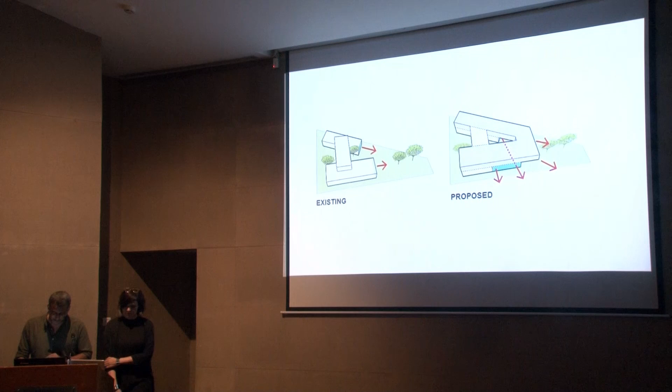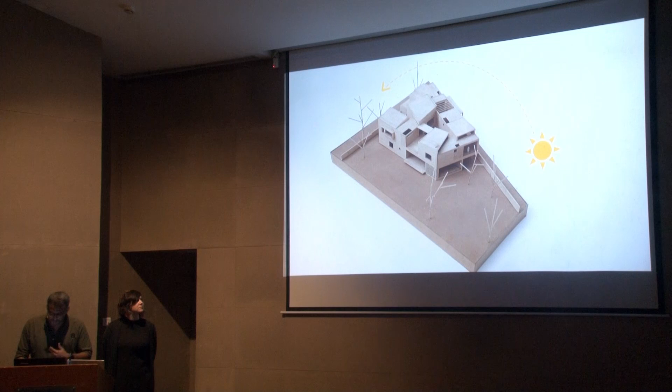The family was keen to retain the sloping roofs. During conversations with them, we realized it had little to do with the actual form, but the experience from the inside. So we reinterpreted this through a series of one-directional sloping roofs with clerestory windows that allow for softer north and east light through the day.

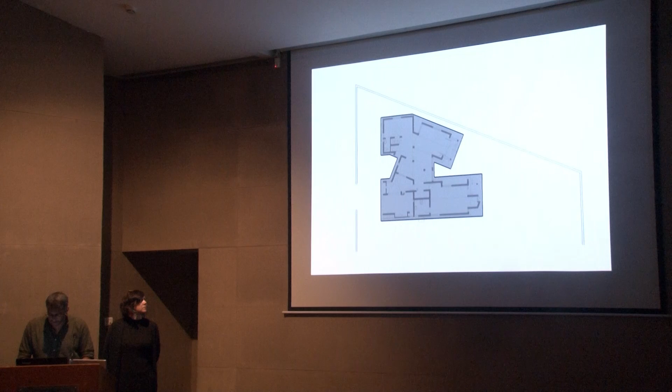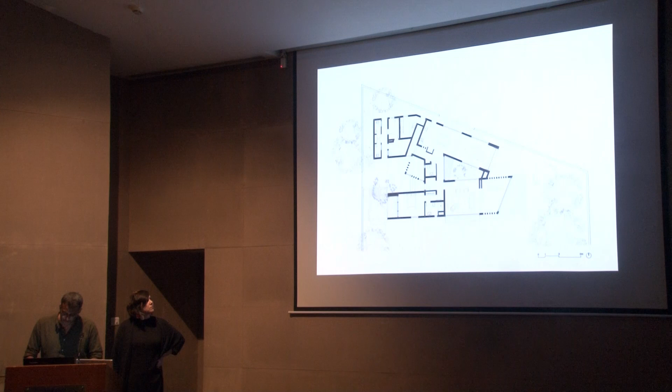These plans show the layout that was a direct result of extending that existing footprint, to enclose a central court with a high level of porosity between spaces both at the ground floor as well as across to the upper levels through double heights and diagonal views.

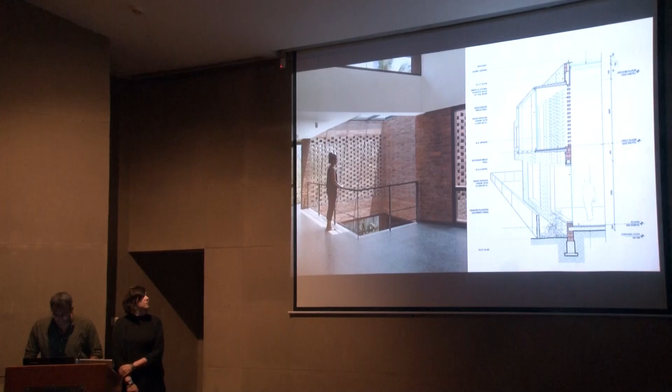We also just wanted to show a little bit about how the structure was made through the narrative of the space. A double height between the family lounge and library above and the open kitchen and dining space below ensures interconnectedness. The dad joked that he wanted a space that he could watch his kids coming home at night. And so this family space is the heart of the home and a visual connection between the public and private spaces of the house.

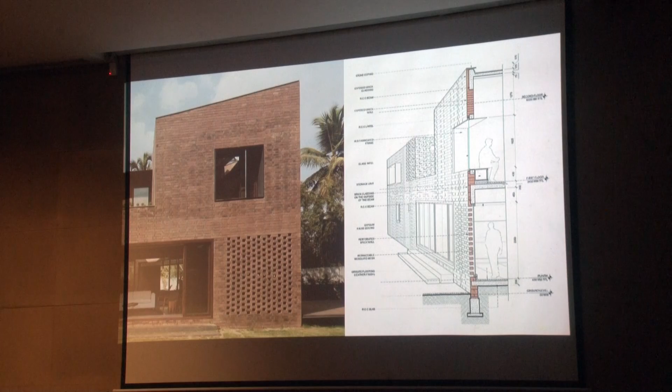The slabs and beams were set in by one brick to allow a continuous uninterrupted volume from the outside. The rough brick is contrasted with these crisp metal punches forming windows, window seats, and clerestories. The small triangular court at the center of the home stays a reminder of the original foundation and the history of the site, creating complete porosity between inside and out. This is the master bedroom at the back corner of the property with views out to the last remaining parcels of farmland in the area.

The project is located on a steep sloping site overlooking the Durgam Cheruvu Lake. Due to this topography, the site has prime views across the water to a nature reserve on the right and the contrasting density of HITEC City in the distance, which is at this point just starting to be built out. This is a 150-acre tech park that has become a prominent part of the urban landscape.

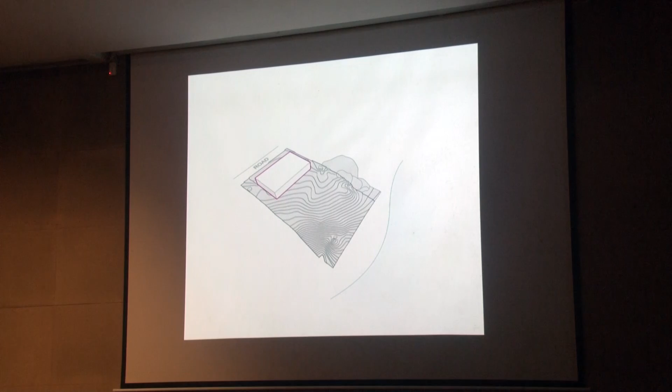Imagine that there are these volumes that are opening up to capture views. Yeah, the three portals. Anyway, so let's go back.

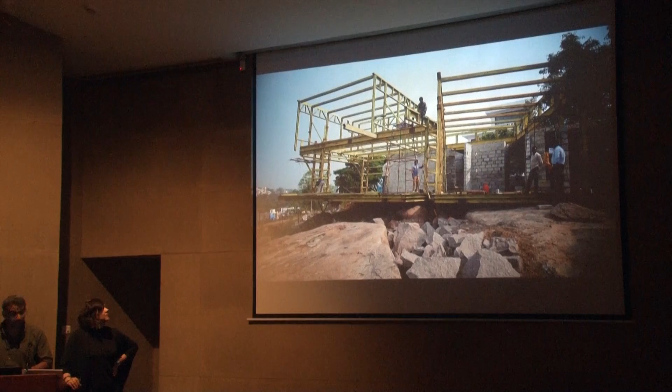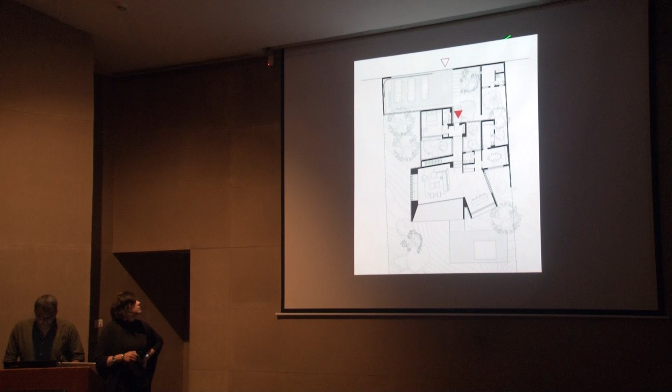So contrary to the standard architectural response in Hyderabad to fill, level, and clear the site, the lake house hovers above the land, allowing the natural terrain to become a celebrated focus of the architectural experience. From the road on the top of the plan there, the building appears solid and opaque, concealing the panoramic views that are framed by these portals at the bottom.

A tension between heavy and light was used to establish a strong material and spatial logic. Along the road, the structure was made in a heavier masonry construction, while the structure towards the lake appears to float in a lighter steel frame. The masonry on the flatter portion of the site is also used to structurally pin back the cantilevered steel structure.

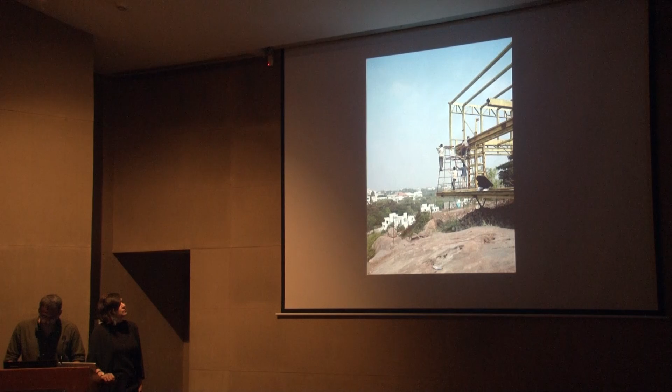The early brief was to build something that was temporary, that could maybe be taken down if needed, but we wanted to build something that was permanent. And about 7 or 8 years in, this space is being used almost every single day, and it's not going anywhere.

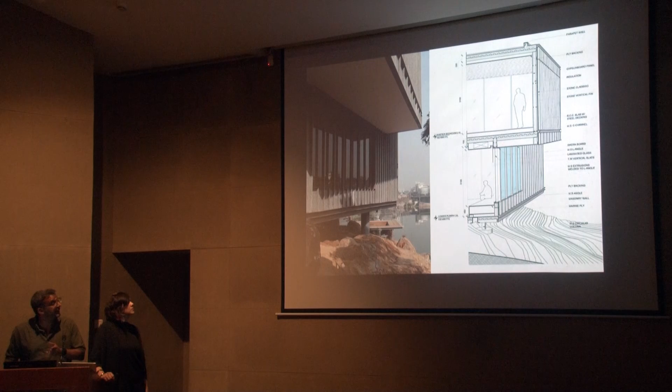The structure is clad with slabs and thin ribs of a local grey granite. This creates a subtle play of shadow while maintaining privacy from the neighbors. These stone-clad volumes really showcase the skill and precision of the masons who executed the stonework, everything on a very strict, repetitive 300 module. These are images from the lake of the finished project, looking at the cantilevered stone volumes with portals clad in wood.

These are some details of the stone cladding with the wood screens that allow for filtered views to these landscape courtyards around the house. The landscape also highlights the transition between wet and dry as an integral part of the experiential narrative.

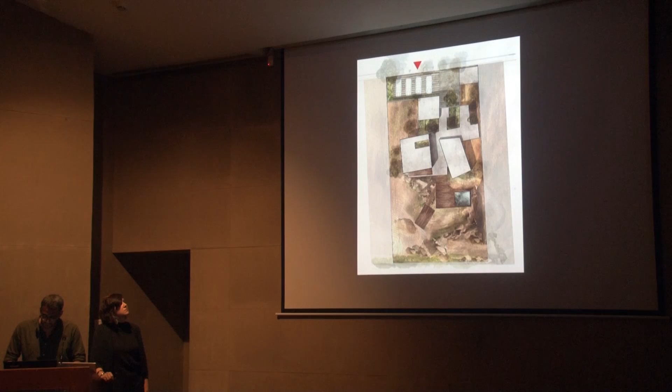As one passes through the building, you get a first glimpse of the view beyond. Slowly, this lush verdant planting of the entrance and passage falls behind, and the dry and sort of rocky landscape of Hyderabad reveals itself, along with this extraordinary panoramic view out to High-Tech City, which is now fully built out.

Today, sustainability is a buzzword, used very loosely and often just as a quick visual response to materials used. This is unfortunate given the rich heritage of resourceful climate-based construction of the past. With materials as a core interest of our studio, we are constantly exploring new methods of construction that are sensitive, local, and long-lasting. In this context, for us, saying we are a responsible studio is a more meaningful approach.

And to tie into some of the other work that we've shown and the projects that we'll go over now, we are interested in responsible solutions, which include sustainable strategies, but in a way that it's hidden. It's not something that needs to scream, I am incorporating all these technologies. We want it to be embedded as part of it by default. So for us, we're much more interested in the type of materials and the way that they translate into a contemporary form. And it's just a given that certain solutions are automatically incorporated.

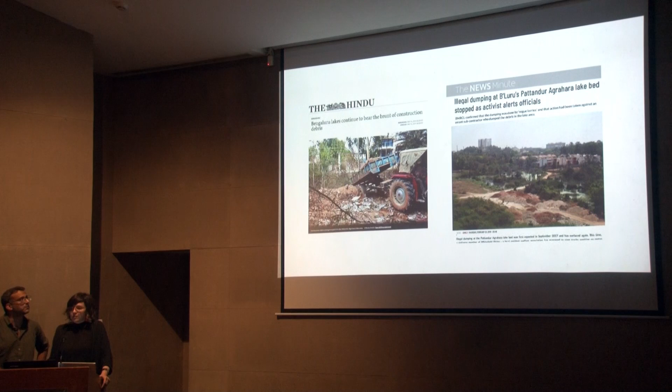In Bangalore, land values are disproportionate to construction costs, so existing construction is given little or no value. This means that there's a constant cycle of demo and rebuild, especially as zoning laws change to allow for more density. Without clear regulations, most demolition waste is sent to illegal dumping areas, often dry lake beds or abandoned urban sites, and it's becoming more and more difficult to find ways to dispose of debris.

When we first were working on the brick house that Cyrus showed before, we really wanted to reuse all the existing brick, and unfortunately it just wasn't possible in that project. So at that time, we started thinking about waste as a resource and how we could use it going forward. When this house came along, we pitched this to our clients as an idea, and they were really excited about it. So here is something that is just dumped and disposed of versus a material that actually has a lot of potential to create a new home in a new language.

We were fortunate that the old house was primarily built in brick and mud with very little steel reinforcement. It was actually amazing that the slabs would stand, they were so thin, but this meant that it could easily be broken down by hand. If it had been a higher percentage of concrete, it would have had to be broken down industrially, which would have meant the material had to go a very long distance, and this wouldn't have been viable. But for us, this house was the perfect option to explore material reuse in a way where it stayed on the site and took on a new form.

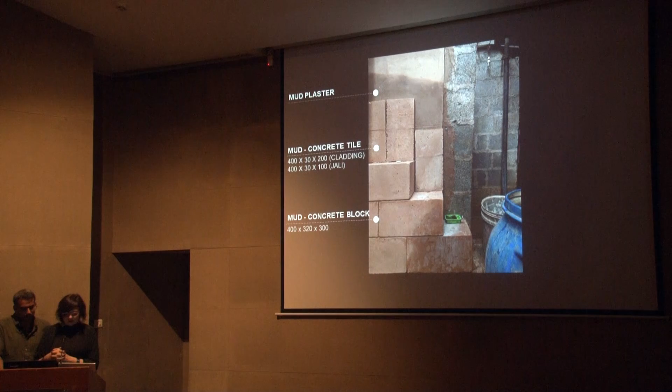So we worked with a professor from IISc who specializes in mud construction to confirm the viability of our approach, finalizing on a palette of mud plaster, mud concrete tiles, and mud concrete block.

The mixture was then refined and tested for durability and load-bearing capacity. Since we did not have any major excavations on the site, the soil was sourced from ongoing construction sites in the area. The total buildup of the house is around 4,700 square feet.

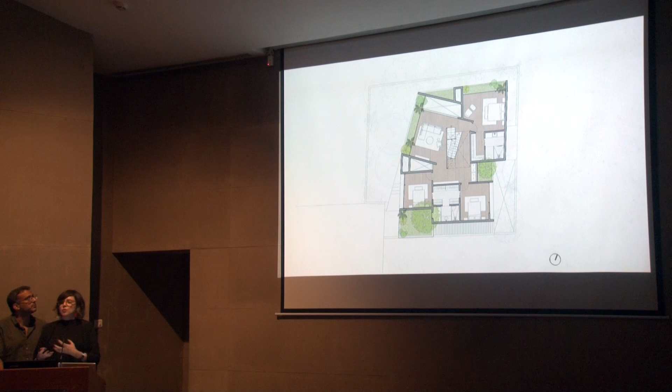Another interesting point here is that we had originally imagined that the stone floor would move throughout the house, but the parents, having seen how their children reacted to a wood floor in their current apartment, really wanted to have this because they felt that their kids engaged with the floor in a different way. So they could run, they could slide, and to us that was a really interesting feedback to incorporate.

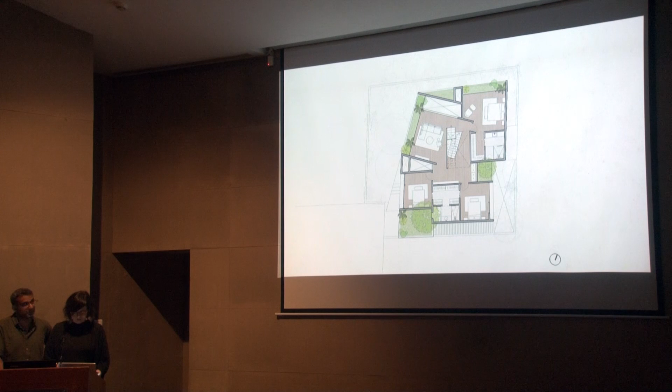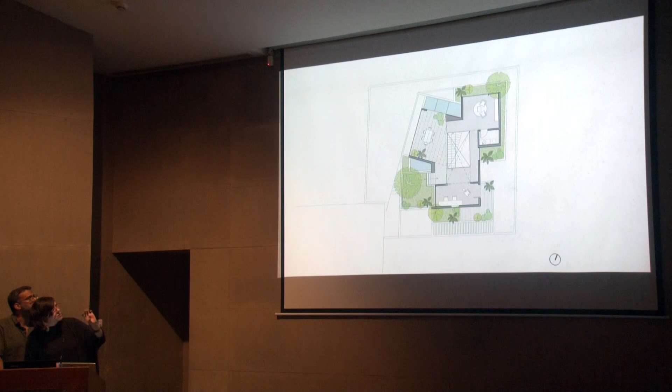And on the second floor, here you can see that there's a cutout to the bottom where there's a staircase that moves throughout all the levels. We have an office, a music room, and a little terrace with a pergola where the mango tree comes over the top.

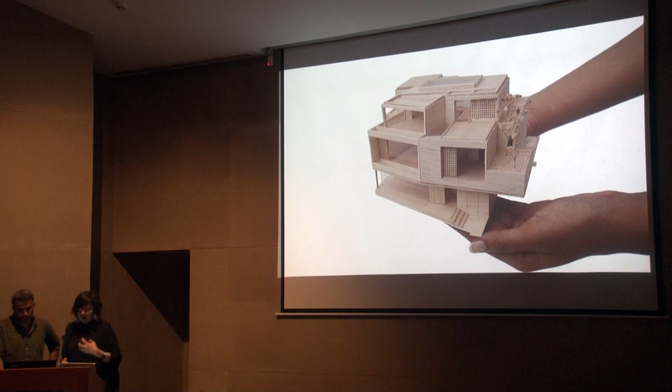So with limited space at the ground level, this model shows how terracing was used to bring landscape to every level. With the building completely disappearing from above, any open space left on the terrace was used for services, including a heat pump and solar, exceeding the building's capacity for power.

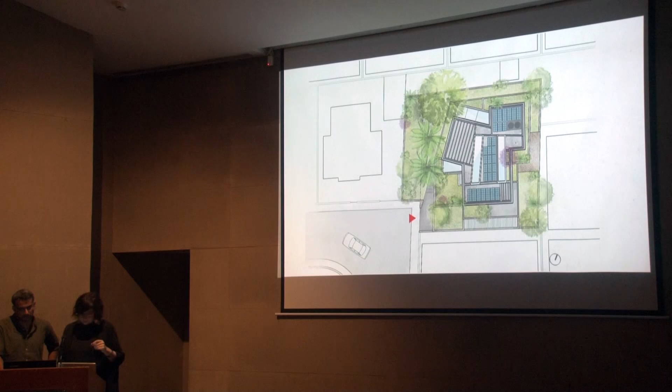So given the inner corner condition, we were really concerned about natural light coming into the space. The skylights here illuminate the core of the home, and they allow for light to move throughout different spaces in different ways. We also played with planter depths. If you see over the entrance drive here, this is a really deep planter.

Part of the client's wish list was to have fruit trees around the house. And with such small setbacks, we were able to accomplish that by bringing them at different levels of the home. So right now we have a big grapefruit tree over the garage. We have lemon on the terrace. There's just all these different plants around the home that have personal meanings to the people that live there.

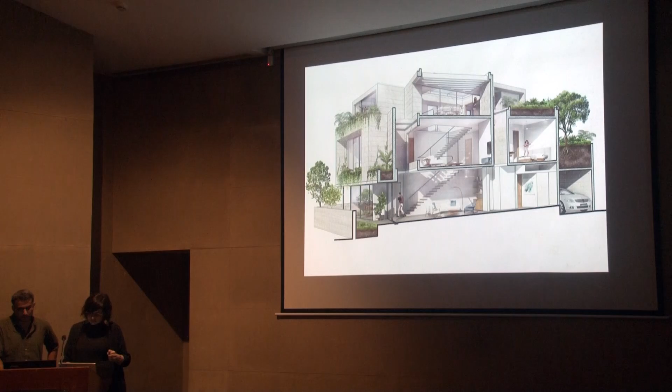So one of the major challenges of this process, and I think in a perfect condition, we would be using the waste on the site. We would be getting the soil from the excavation on the site, and then we would be casting blocks in the same location. This is a perfect world. It's not perfect in general. So we had to find a location to cast the blocks. And this was a challenge in Bangalore because any production of a building material like this could be viewed as a commercial venture, which would lead to problems.

So we eventually found a site that was about 6 kilometers away from our location that was large enough to house the workers, to hold the materials, and to do the casting. So this casting happened as the structure was building up. And seeing this process was really incredible.

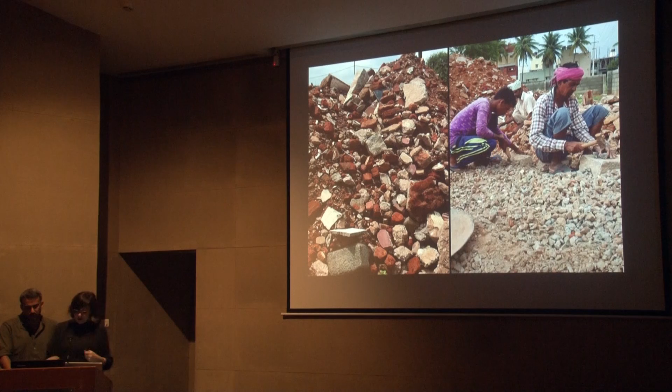I mean, to the image on the left, here, you can see the bits of, you have the brick, you've got a little concrete, you've got tiles. The whole history of the original home is there. It's then broken down into smaller pieces. You can see here on the right side image that they're separating the concrete that will be used for aggregate in the process. And then you just have the materials being kind of pulled apart and then brought back together as we make the blocks.

So the final, we tested many different recipes, we'll call them. We looked at strength, we looked at color. We started off with this kind of designer approach to saying, we want this exact color, and then very quickly realized that that's not something that we can control. It's so dependent on where the soil comes from.

But the final mixture was brick debris, hard debris, which was the concrete, sand, soil, cement, quarry dust from the local quarries, and lime water. So just a few images of the process.

And we actually have a video of this, but it doesn't capture the beauty of the process. I mean, there were stations for every material. There was a proportion that was assigned to it. And then when the machine started, it was like a dance. So you had one guy coming with lime here, one guy coming with the brick debris here, and it was all put into the mixer. And it was just this incredible process to watch.

And so then after it was mixed, it was poured into the custom molds that we made. It was then vibrated by hand. Again, ideally you would want to do mechanical vibration. It would give you a more even finish, but here, due to the site, we did it by hand. It was then smoothed, and finally it was air dried. So we did in total about 8,000 blocks. They were then stacked, dried on site, and when we were ready for them, they were transported.

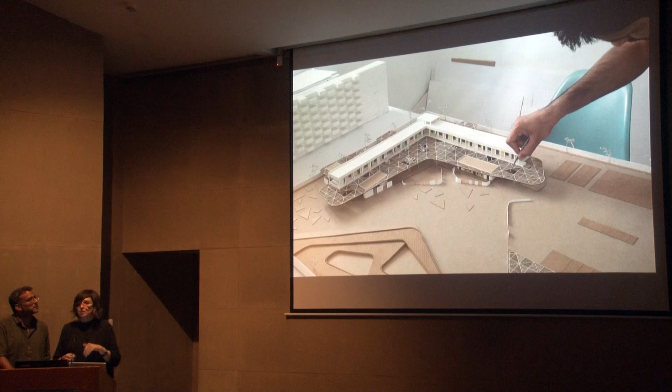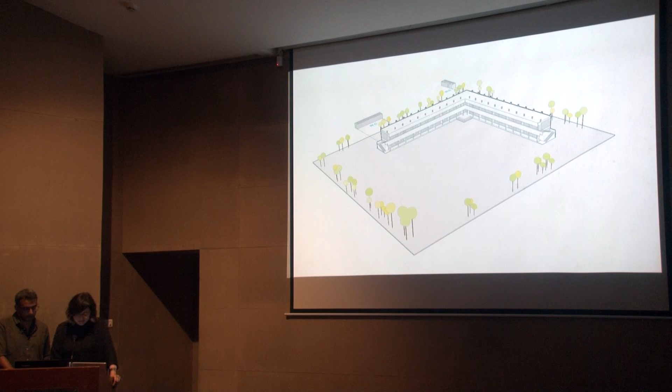So while the client was open to taking down the old building, we wanted to keep the existing structure. We had really enjoyed the process of the adaptive reuse project that we did on an old watch factory into a Montessori school. And there's something about these large span spaces that is really conducive to academic environments. This building just needed a facelift, that's all. So we kept the existing structure.

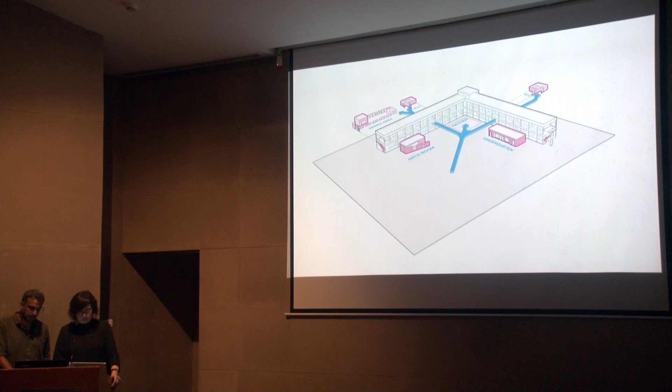We reworked the existing oversized classrooms to increase the school capacity from 400 to 600 students, and we opened up the facade for far more light and ventilation. A subtle but strategic use of color and pattern through jalis gives each classroom an identity.

Gathering spaces are important for any learning institution. To respond to the climate, we introduced pockets of landscape using regional plants and trees to not only soften the architecture, but to also provide shaded spaces for the children to come together.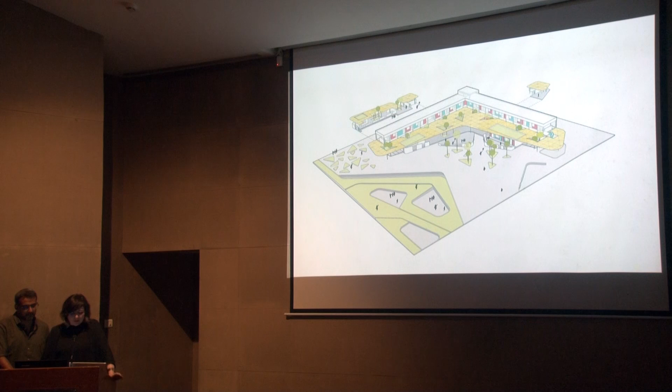Now, all this is tied together by 15,000 12-foot long bamboo poles that form a playful undulating canopy that connects the main building to these pavilions. The additional canopy, along with the pavilions, doubles the total usable area in the school from 20,000 square feet to 40,000 square feet.

And when we initially made this proposal, we had no idea that the client was actually going to go for it. They could have said no to any of these things. And after we made our presentation, everyone was on board. It was really incredible.

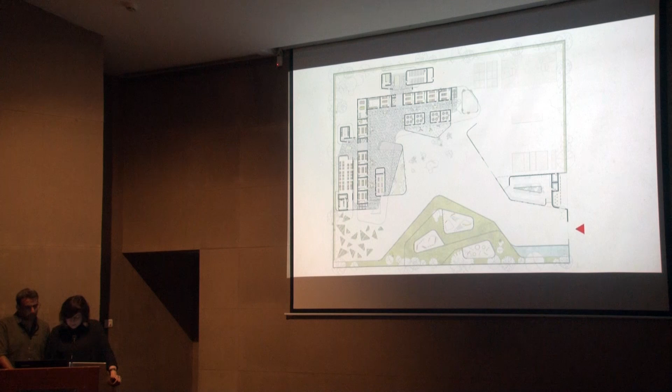So you enter the property from here. This was our initial proposal for some landscape that maybe will happen in the future someday. This is the cycle stand, and this is a little waiting area for parents. Before, there were only trees along this edge, and all the parents would come in and sit here. So now they have a shaded place to stay. This is a little store for them to pick up the books and uniforms as required.

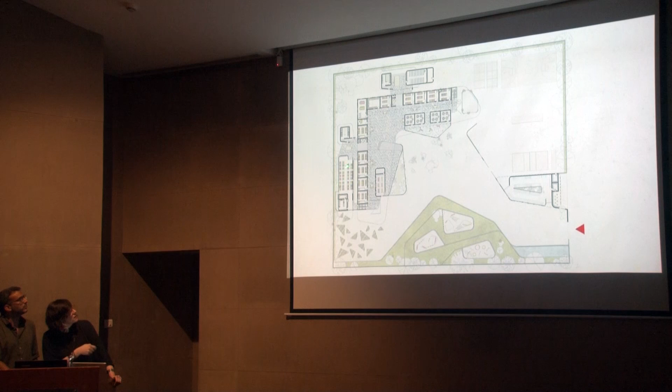Cycle stand, and then as you come in, this whole area that you see in gray is actually part of the canopy. There's a little sand pit here for the tiny kids, kindergarten and pre-K, and then you have all the classrooms, labs, teachers' rooms. This is a bathroom, and multi-purpose space here, and then we have a dining hall here and an art room.

The lower floor is for the little kids up to 5th grade, and the upper level is for the older students. This also has a computer lab, a science laboratory, and a faculty space for the upper grade teachers.

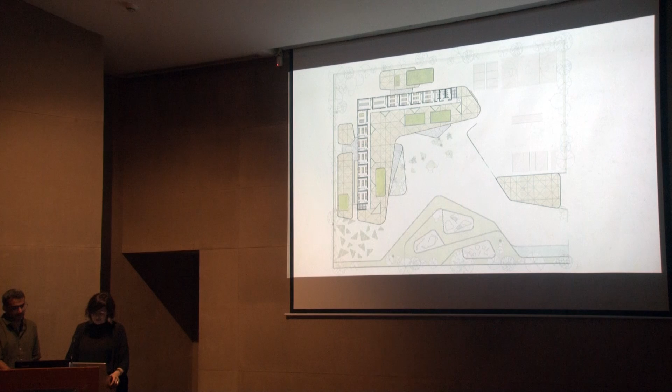Now, there were two main challenges during the construction. One was material supply and labor at a really remote site. We made a conscious effort to ensure that the materials were sourced locally. Nothing came from more than 100 kilometers away. This includes the bamboo that was harvested through local government forestry programs. The stone floors used waste from the stone processing facilities in the villages nearby.

The cement came directly from the factory next door, and this was used for the wall construction as well as the jali screens that were cast on site. Finally, the facade was finished with a simple cement plaster, and the labor was local, largely unskilled, but trained and supervised by the engineers from the cement factory.

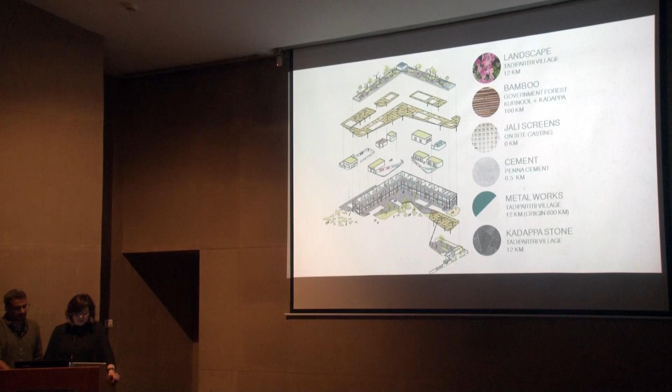The second challenge, and I think that this is a challenge for any project that involves CSR funds, is that the school had to remain operational for the 6 years of construction. This was something that we were in for as long as it was going to take. It would pick up pace, it would slow down. It just was as the money was available.

But it was amazing how the factory team, the faculty, and the students just went along with the process. We had to zone the construction, the students moved around. At some point, they would be sitting outside on foldable lawn chairs with just a little board doing their exams. Everyone had a smile. It was just really incredible.

And the head engineer of the plant who oversaw this process, maybe 4 years in, we were walking around the site and he said, everyone asks me, what are you doing? You could build like 4 cement plants in this amount of time. And he said, come to the school and see what we've done, and then you'll understand. And so for us, that was really meaningful. Every site has its frustrations, but here, I think everyone was really doing it from their heart.

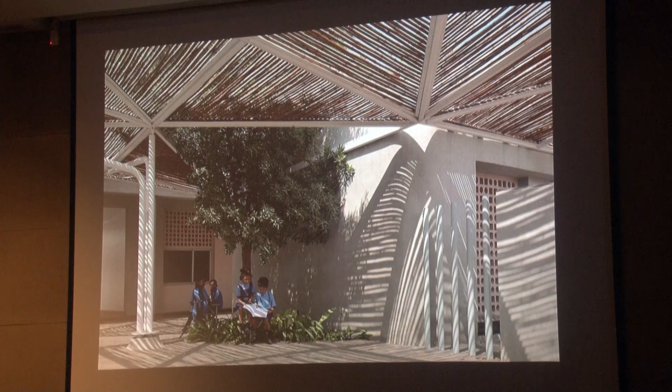Even the Vastu consultant that the client had, at first he was like, all the walls and all the corners need to be right angles, and then we went back and we were like, but this is a school, we want that soft corner, and so he was like, okay, fine, I get it. I have a young child as well, and so he said it's okay for the exterior corners to be curved as long as the interior corners were straight.

And because this was actually built by engineers from the cement factory and not people that had construction experience, the engineers themselves really geeked out, and they made sure that every line was straight, every corner terminated properly, and in the end our civil quality was probably better than most of the high-end residences that we do. It just took time, that's all.

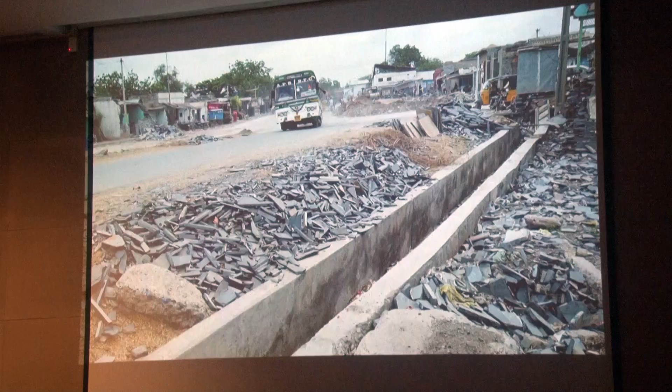So kicking off the project, we knew that we wanted to build in a way that was a tribute to the past, that had that weight, that permanence that the stone architecture of Bangalore had. We wanted it to be grounded, we wanted it to be specific to place, but we also wanted to find a way to do it responsibly.

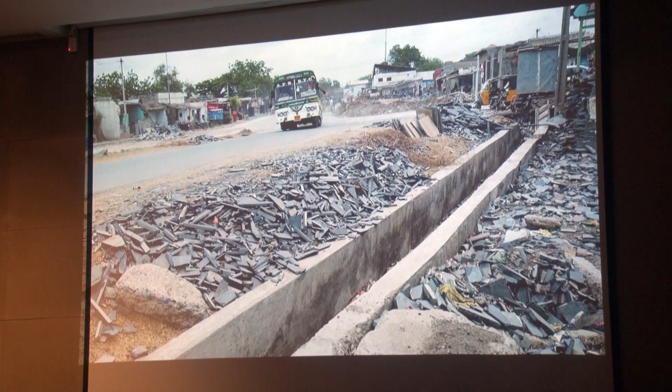So we thought back to 2016, when we first went to this Penna cement factory. On the way, we drove through the stone processing towns where they process Kadapa, and the roads were covered with waste from the offcuts of the production process. And we were really blown away by the fact that in this little village, the community had adopted this material as their standard form of construction.

The structures are completely load-bearing, and they were beautiful in their own way. We were like, okay, this is like a Zumthor project, but in this village. It was really incredible, the way the stone is used. Sometimes it's plastered, sometimes it's left exposed.

And in this area, due to the road widening, they've been knocking these buildings down. So when you go, you actually see them in section, which is sad, but interesting at the same time as an architect.

So by chance, when this Nandi Hills project started, we were also doing our office floor. And this was an old house that we were just touching up, and so we wanted to use stone, and we wanted to save money. And so we were looking, cheap and best. When it comes to yourself, it's cheap and best.

So we were looking at 10 mm granite tiles. They used to be really popular. Now they're not as much, but the Sadahali ones are still going strong.

So after researching the process, we realized that there are these small quarried blocks that are then cut into 1x2 tiles. But if you can see here, you have the module of the tile, but then there's all this extra stuff that's there. And we realized that the same waste was being generated very close to the Nandi Hills site.

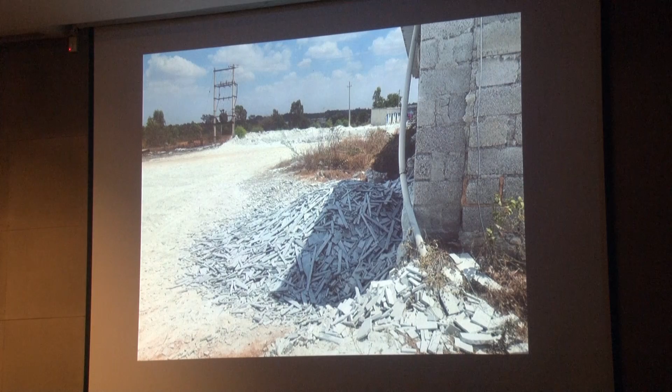So we said, let's use it. Let's see what we can do with this. We had really wanted to use the Kadapa waste, but then when you consider the transportation associated with driving it such a far distance, it doesn't really make sense. This made sense to us, and we were really fortunate to have clients that were interested.

So this was the moment of truth with our client checking the wall mock-up. And we were very clear that this was not going to be a fast process, but this was something where the exterior of the building would be finished as these walls were constructed. And for them, they really liked that idea. They also liked that it was connected to place. They liked the texture. They liked the color. So all of that kind of came together nicely.

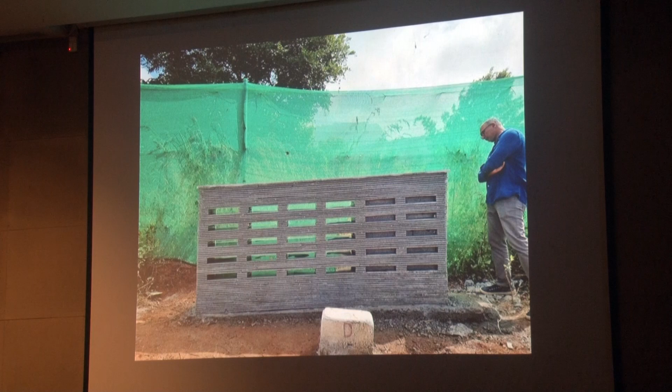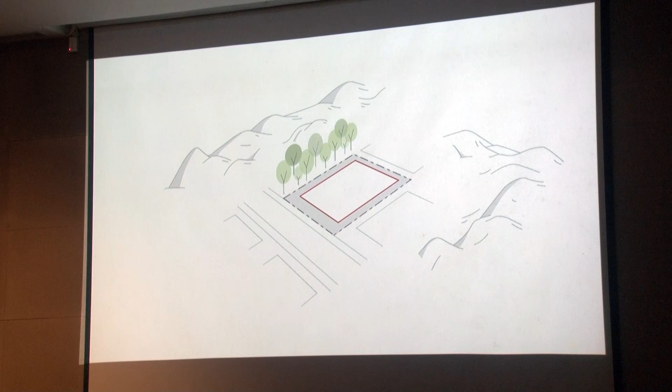So just quickly taking you through the site location. This is part of a plotted community, but everyone can build their own house however they want it. Originally, it was a Bali theme. As you see, we did not pay attention to that, or maybe we forgot to read that part. So the site, one second, we just kind of took the massing up, looking at what we could do. And as a response, we started to play with the volumes, looking at sun and views. And then, of course, how we integrated with the landscape.

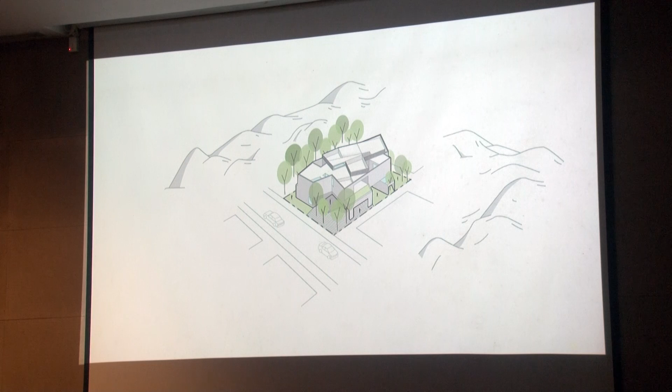In Bangalore, the climate is great. It allows for plants to be inside and out, and AC is becoming a bigger thing, but we can really capitalize on the outdoors. So the ground floor, as maybe you can tell, we like to play with our plans a little bit, but this all comes from thinking through experiences. It's really about the relationship between spaces. This is for a couple that are looking to move here full-time. They don't have kids, it's just them, and we really wanted to create a space that was special. They do a lot of entertaining, but it's at a small scale.

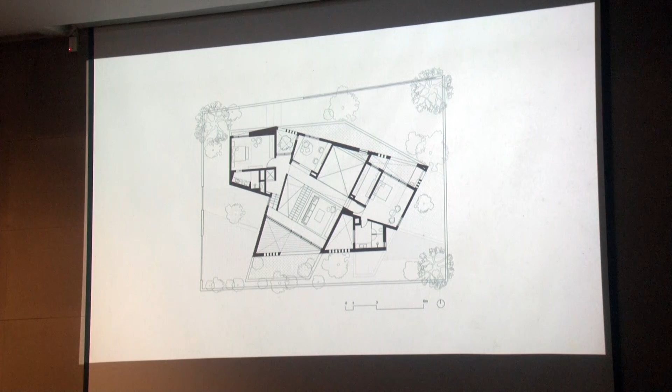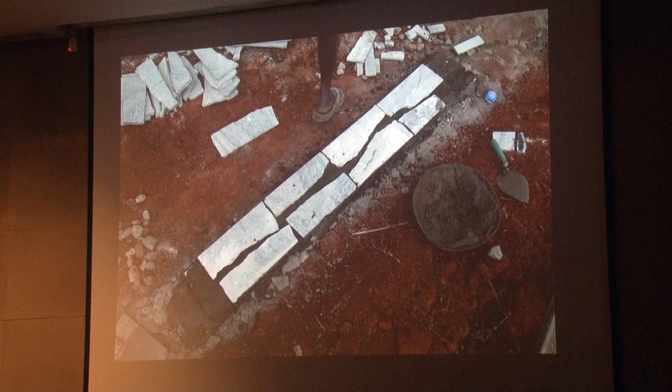So we started with the idea of let's do some load-bearing walls. The idea was that we took the straight edge of the offcut from the tile production, and we put the jagged edge on the inside, which allowed us to keep that precision of the exterior. Again, this is a hidden story. It's something that the homeowners and we are very aware of, very passionate about, but anyone driving by would have no idea.

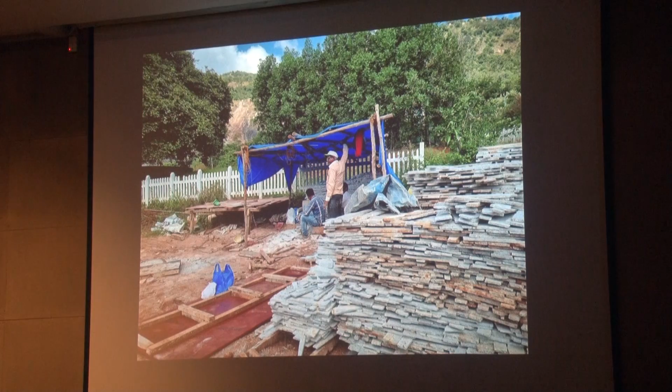This load-bearing strategy also didn't work. It didn't make sense for many reasons, but this generated a research process that ended in a hybrid wall construction that is quite interesting. So here you can see the waste material came to site. Every week a truck would go around to all the processing plants and pick up their waste and then bring it to our site. And the process of laying these offcuts, I mean, it is really time consuming, but it's quite beautiful, and you really feel like the structure is grounded. You can feel that weight.

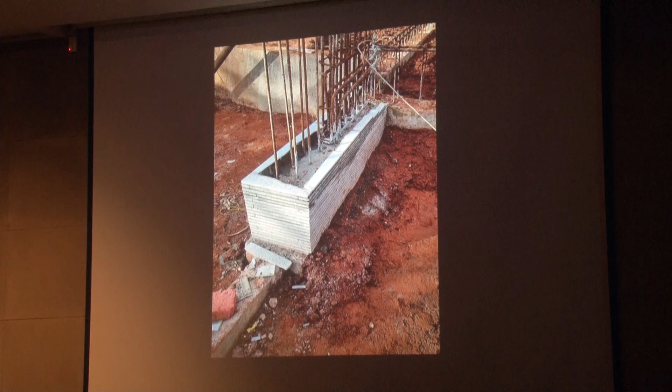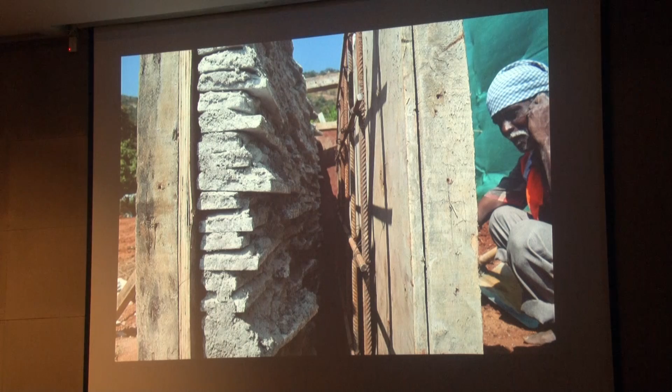So what we ended up doing was a hybrid wall construction. The offcuts are placed smooth side out, rough side in, and then rebar is put in the center, and we cast concrete at 2-foot increments as the walls came up. This image shows when 3 sides of the wall are exposed. And this is an image showing where we would have a plastered surface on the inside and the stone surface on the outside. So you can see here how the formwork just holds that in place. And this really captures the kind of rawness that is now embedded within the walls. Just a quick view as the foundations were coming up, and then as the walls were constructed.

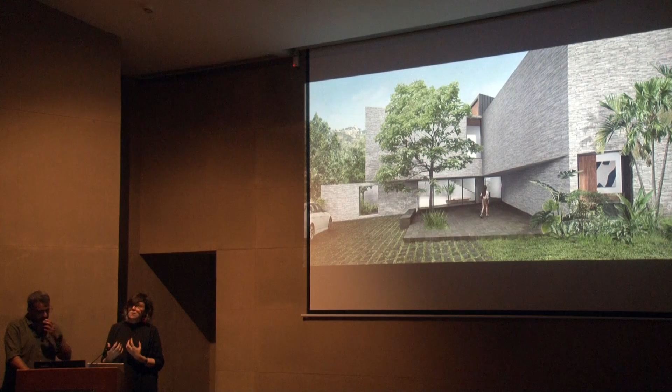And for us as a practice, we spend a lot of time in the concept phase developing the ideas, working. Sometimes our concepts are fast, sometimes they could take a year with all the back and forth with our clients. Our end goal is that everyone is completely on board by the time we actually start the heavy-duty drawings and then construction. And so for us, the representation that we show when we're signing off on concept barely changes to the end result. And that's something that's really important to us.

A lot of times clients or people from our office walk around the space and they're like, oh, we feel like we're in a 3D model, or we feel like the space is so familiar to us, and it's because they spent so much time with us studying it and working through it. So in the end, this is a home only for this family. It's not meant to be for anyone else. Their friends might not like it. We don't care, because we love it and they love it, and that's what's important.

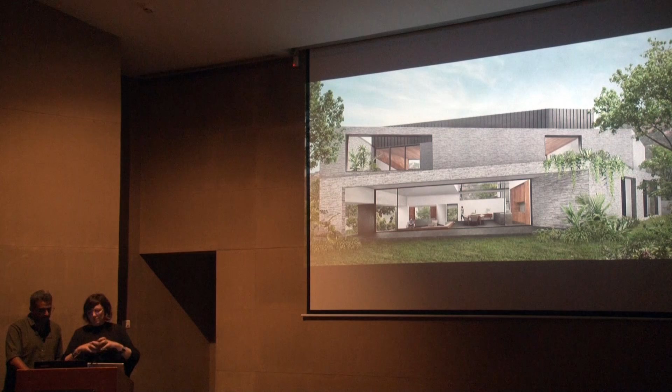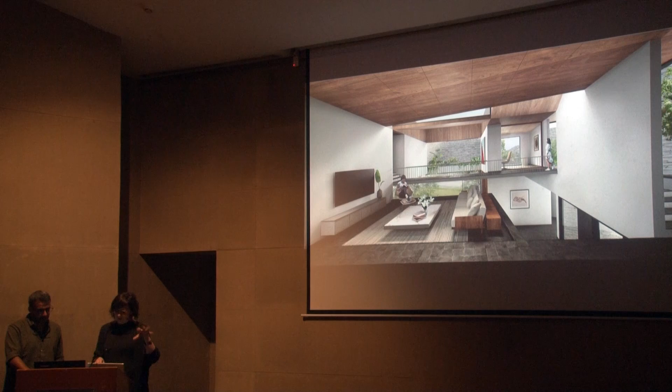So just showing you, this is from the side of the house. This is facing a garden. It opens up more, capturing views of the hills, and that same render now under construction with the same view. So this is going to be the family room with the bridge connecting the primary bedroom to the study and the staircase, and then a view of this under construction.

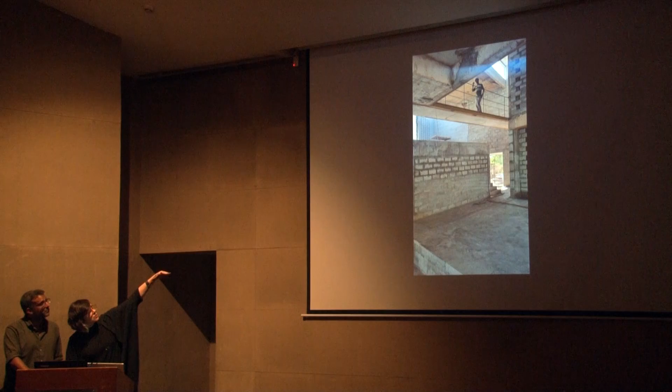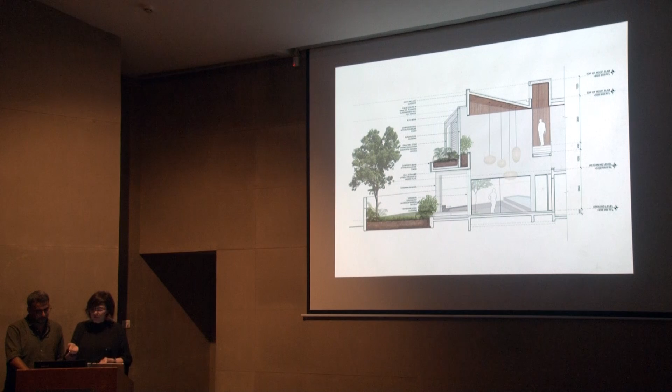So here's a moment with the bridge connecting across, so that partial level is where the family room is above. And then just looking at the way that the walls are constructed, you can see here the hybrid wall, the jali, and then the way that we're playing with wood on the interior to bring in some warmth. And another section here. Again, landscape moving up through the levels. That's something that's really important to us. And then the lightness of the space inside.

So just a few more images from a recent site visit. This was a few days ago. So just showing the texture and the beauty. Here you're at the bridge level, looking down into the living room. So you just get a sense of the scale by the craftsmen working there. This edge here. This will all be planters at the higher level, cascading down.

And a few days ago when we were at site, with every project there's ups and downs. People get frustrated with time, with various things. But what was really nice is that we were standing in this location and our client was looking at the home, and she was like, I've taken pictures throughout this entire process, and for me, how this was made is so important. I know it took time, but I understand the value. And so for us, in the end, that's what's important. We're not here to force a way of living or to force a technique on someone, but we really want it to be a collaborative experience that in the end feels like home.

So as our studio passes its first 10-year milestone, we reflect on the challenges, opportunities, and learnings that have led us here today. We are a quiet practice, not bound by a particular style, but a clear sense of principles. We believe in relationships, responsible, honest design, and being a good neighbor. With each project, the parameters always lead to a different outcome, but we strive to evolve by capturing what is essential and what is meaningful.